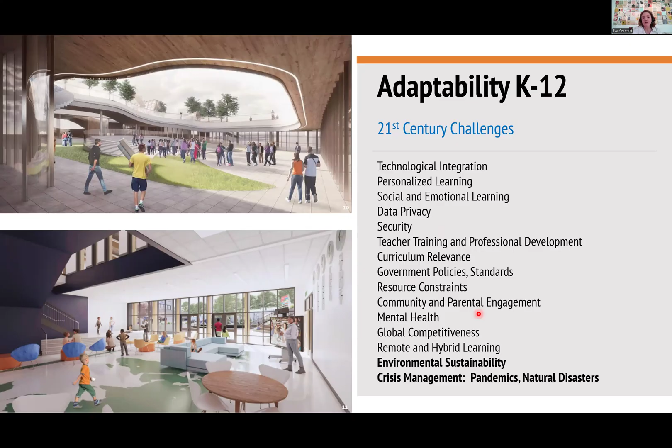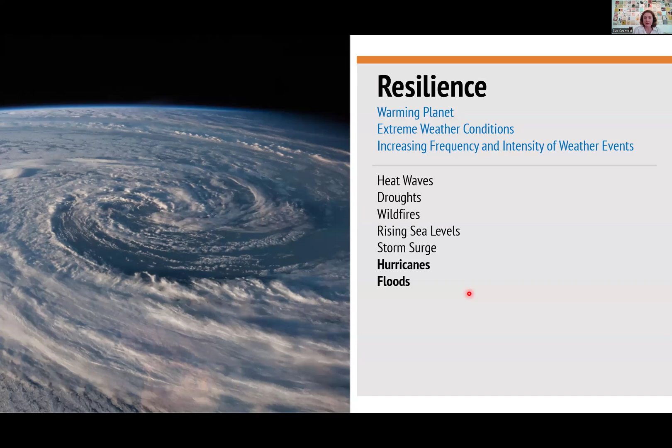Resource constraints that communities may have, community and parental engagement, and then going all the way down the list to environmental sustainability and crisis management, pandemics and natural disasters. And then resilience, and how do we deal with a warming planet, extreme weather conditions that we're faced with, and the increasing frequency and intensity of weather events. You can turn on the news every day and see these events happening all over the country: heat waves, droughts, wildfires, rising sea levels, storm surge, and what we'll be discussing today, hurricanes and floods.

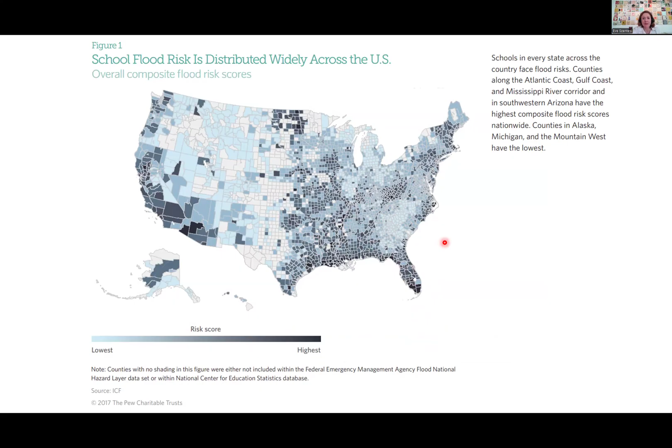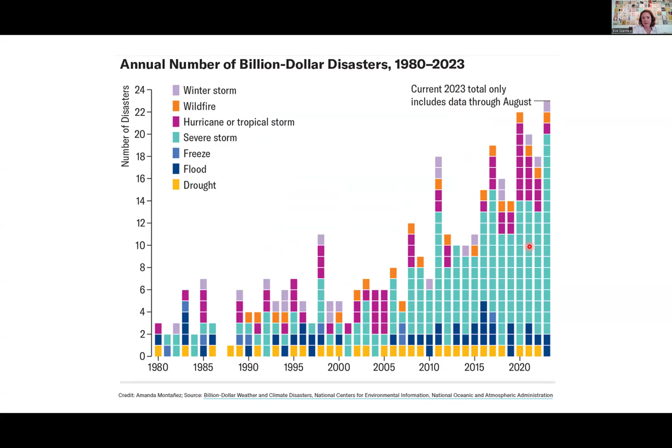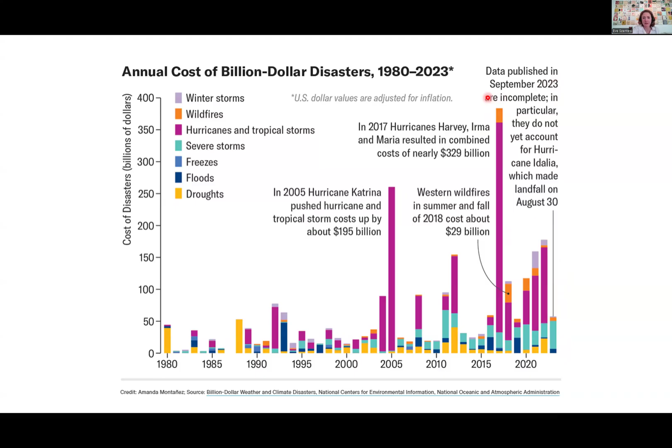So flood mitigation - these photos were taken in our area. These were up in the mountains, up in Boone, after Helene came through. But basically just flood mitigation, technical strategies, and philosophical principles.

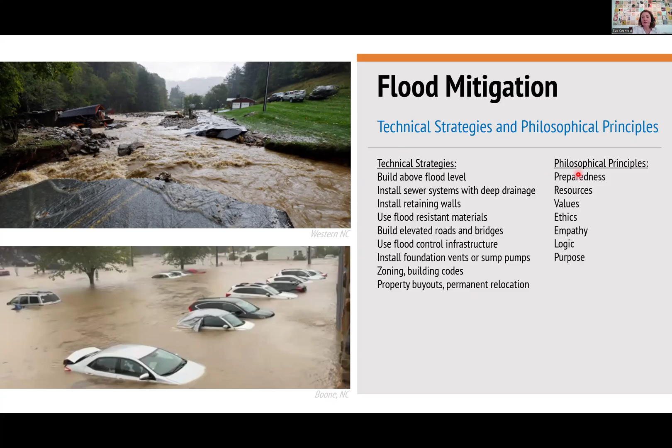Some of the technical strategies: build above the flood level, install sewer systems with deep drainage, retaining walls, use flood-resistant materials, elevated roads and bridges, flood control infrastructure, foundation vents, sump pumps, and then zoning and building codes, and then permanent relocation in some instances. And then philosophical principles: preparedness, resources, values, ethics, empathy, logic, and purpose.

This is just showing in our area that we have different areas where we have different types of events happening in different regions, but it's a whole host of different types of geography. So here's our case study.

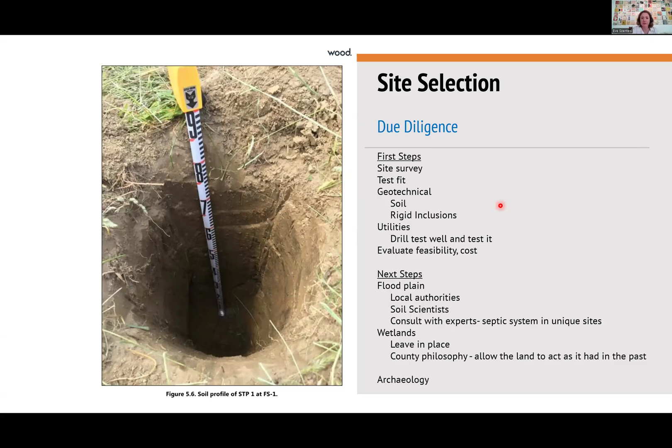So we looked at several sites with them and did site surveys, test fits on them. We had geotechnical engineers looking at the soil. Utilities were an issue - we had to drill test wells, test them, and then look at the feasibility and cost. Once they went through all the first steps and got a check mark, we would go on to the next one. We evaluated the floodplain issues on the various sites, and there are a lot of wetlands in the area as well. We also did an archaeological study of the site.

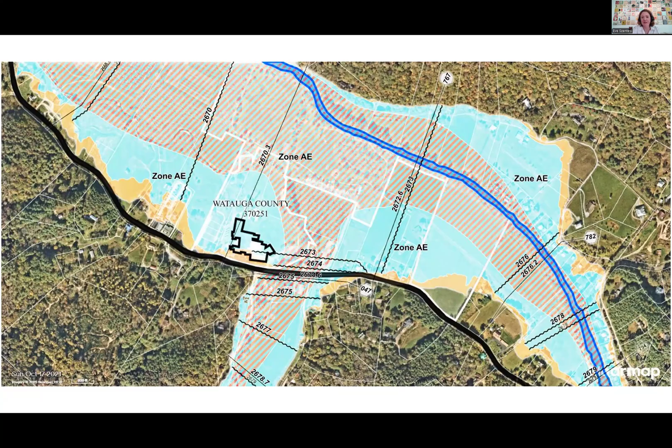So this is our flood map - you can see what's going on here. This hatch is the floodway, where we're not able to build any permanent structures. The blue part is a 100-year floodplain, and the orange is the 500-year floodplain. You can see on our site that it's a little bit of an improvement, but not a lot - that was pretty challenging dealing with the high floodplain. So here we are - this is a section of our site.

So Broadstone Road here at the high point, and then down here it slopes towards the Watauga River. The 100-year floodplain base flood elevation on the site is 2675, and you're required in Watauga County to go 2 feet above the flood elevation. We went 4 feet instead of 2, trying to find a balance with the elevations on site and how much fill we wanted to bring in. We wanted a bit of a safety factor, given what we knew about the history of the site and the flooding.

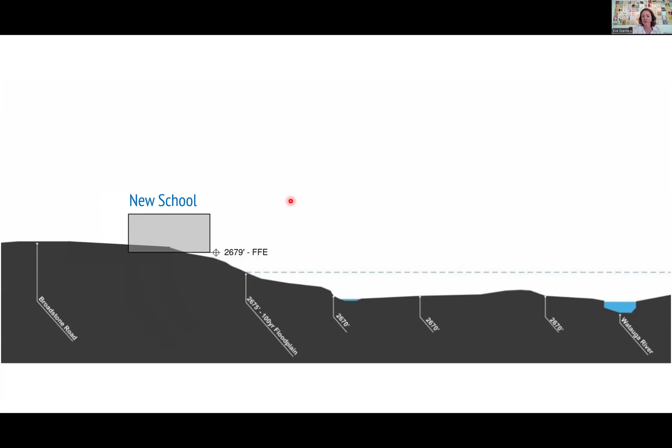But there were other considerations too. It would be great to go even higher, but because it's in a historic district we were limited to the height we could have with our building, so there were massing restrictions. We ended up 4 feet above the floodplain.

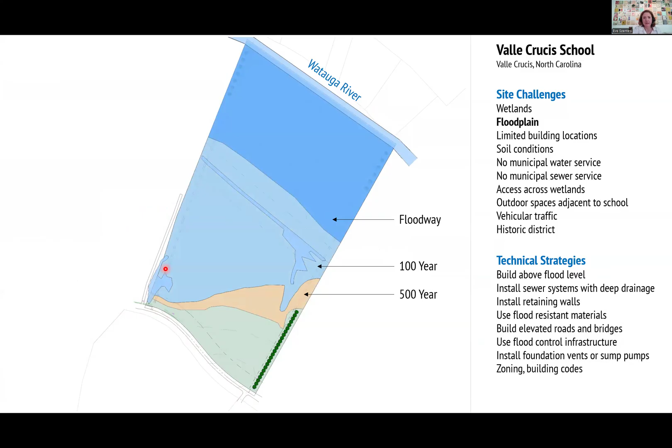So here's our site, the Watauga River back here and Broadstone Road here. These are some of the site challenges, the wetland areas I mentioned earlier, and here's our floodplain information. We were really limited to this corner of the site as far as trying to do something cost effective. We raised this entire site 4 feet all the way around, and we had to place the building on rigid inclusions because of the soil quality.

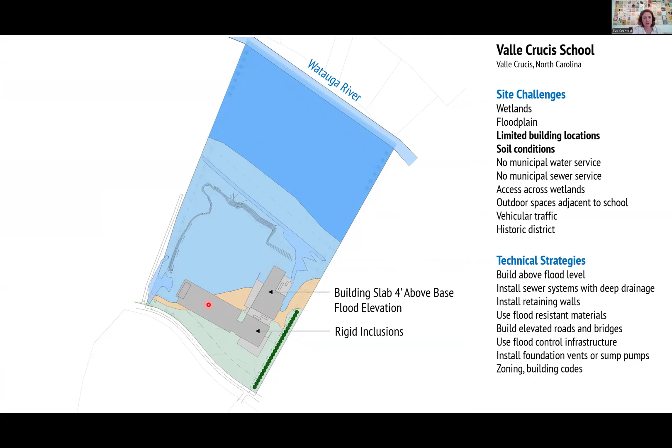We also did not have any municipal water service on the site, so here's our well and the 100-foot easement we put in place. We also needed a fire sprinkler tank. So without municipal water service, you'll see what looks like a silo on the project—that's our tank devoted specifically to the sprinkler system.

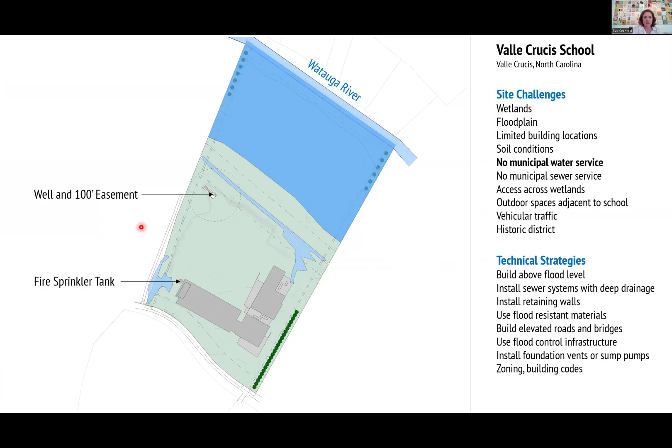There's also no municipal sewer service, so we have a septic field. All of the major components and equipment for the sewage septic field are 2 feet above the floodplain, and they're built so that if there's a flood event, the force main check valve on the system shuts down.

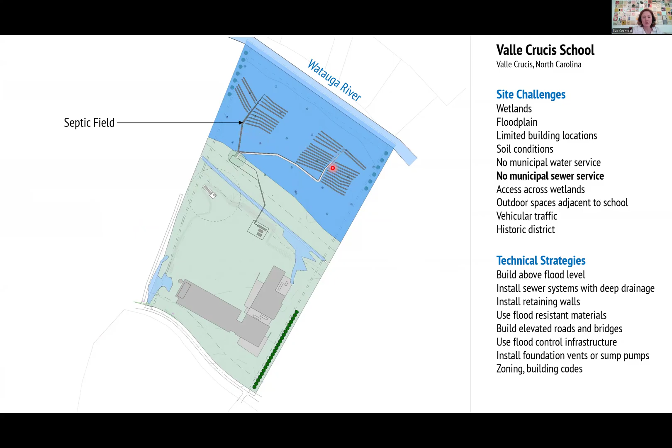Because we're restricted to this corner of the site, we had to bring in vehicular bridges to cross the wetlands. We left the wetlands intact—that's the philosophy of the county. The wetlands actually come under the bridge we added and under the building in sections, so a portion of the building is suspended over the wetland from the structure above.

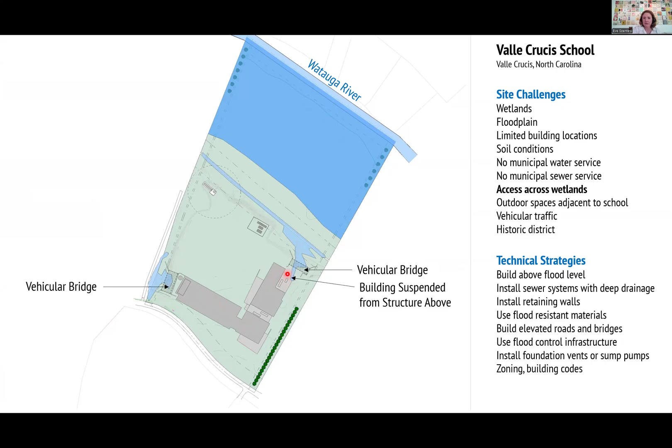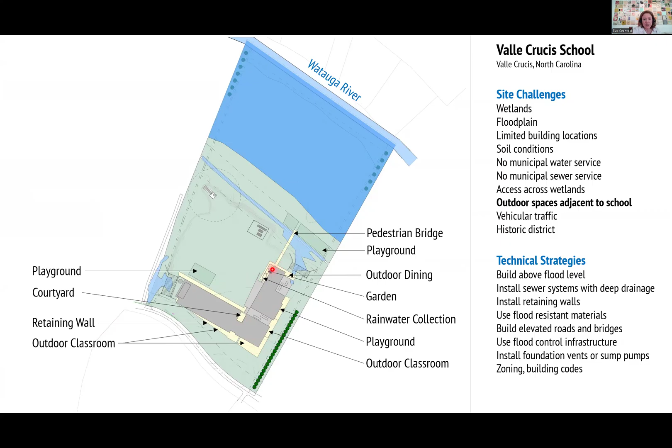They also wanted outdoor spaces adjacent to the schools, so we have a series of retaining walls, and these yellow areas are outdoor learning areas. We have a green roof here that's also an outdoor classroom for the older kids, and all these little nooks and crannies become outdoor classrooms. There's a courtyard by the main door, and we also have outdoor dining at the cafeteria, rainwater collection, and a garden for the kids to plant vegetables and things.

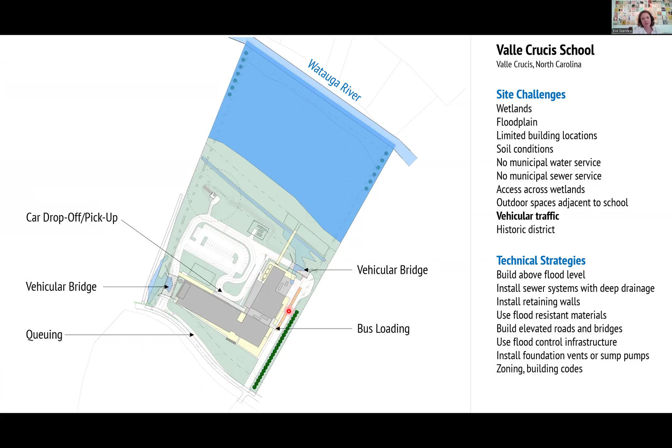So when we drop in the circulation, you can see there's a queuing area here, and then the cars come in and there's a drop off. The buses peel off here and go across this bridge, and the bus drop off is over here on this side. You can see this under construction right now.

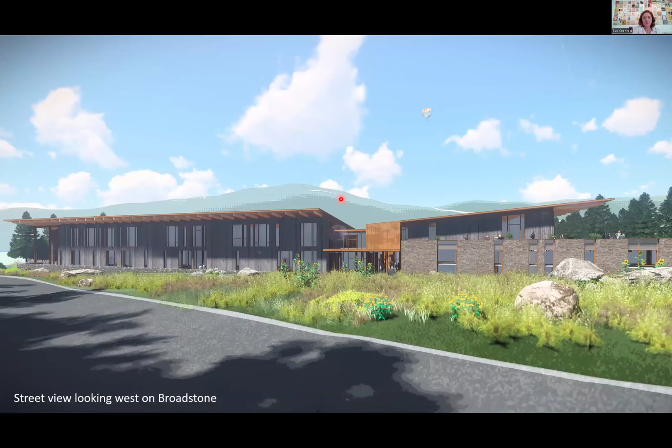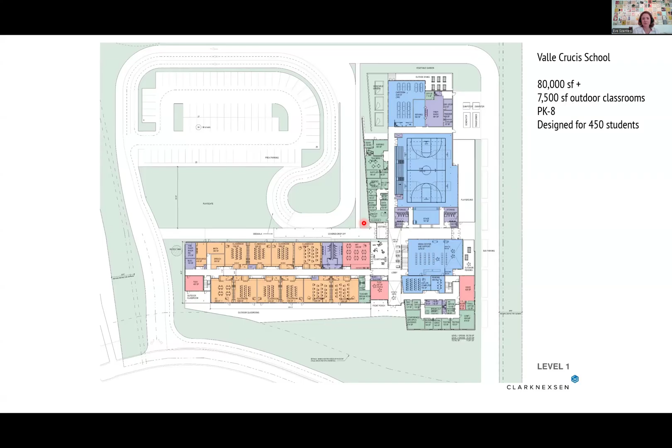We have the media center here, and then support spaces over here. Anything in red is a flexible space. We built more square footage into this to accommodate growth. A lot of these classrooms right now are not flexible, but a few are. This is the second floor, with our green roof over here, some band and CTE classrooms, and then the rest of the classrooms over here.

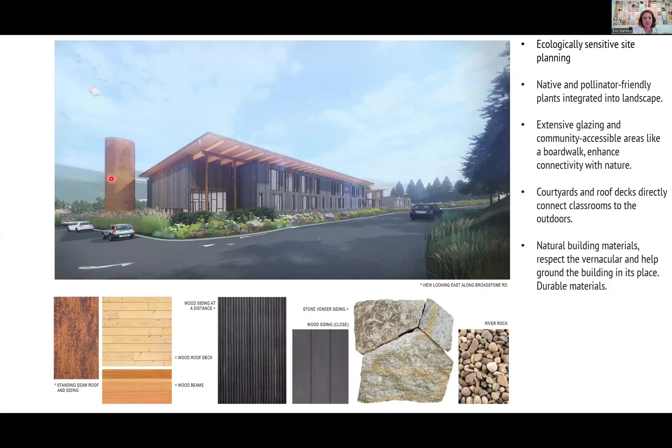Here's our sprinkler tank, and here you can see our green roof and some of the stone siding. The existing original portion of the school has stone siding, so we tried to take that stone pattern and color to resemble it.

You can see retaining walls here, and these are some of the outdoor classroom spaces, and around the building there's a pedestrian walkway that crosses over to the field on the other side.

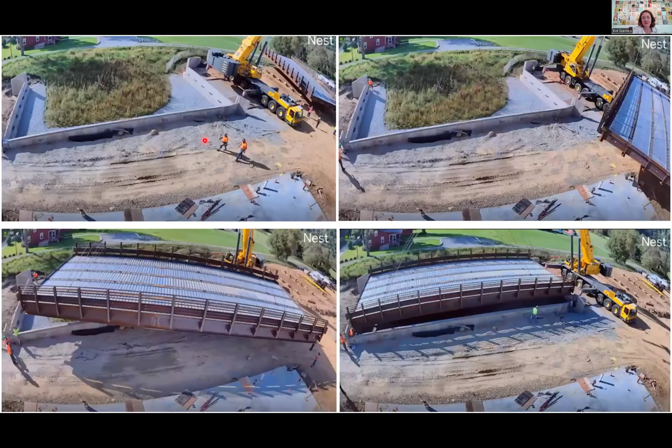Just to give you an idea, this is one of the vehicular bridges. In order to preserve the wetland, they built the abutments around it. We're not allowed to touch the wetlands at all during construction, so it's been challenging in terms of the construction.

This was taken from a camera off the roof of the building. They built the bridge on site, then took a crane and swung it into place and lowered it down. We were really excited when it fit - it was a very exciting day, pretty cool.

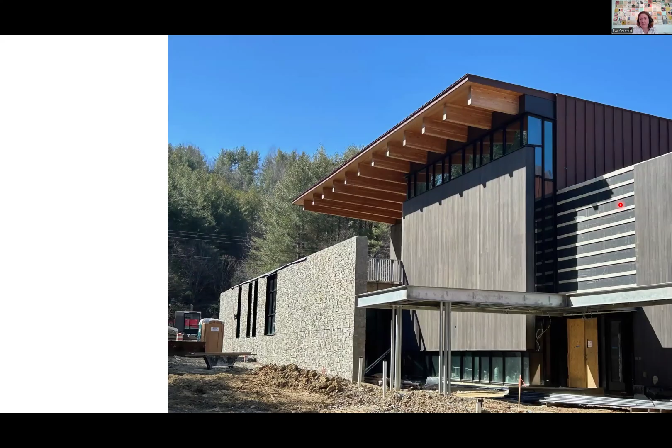Some of these, the cladding is in process. Any horizontal battens you see are areas where the acetylated wood just hasn't been installed yet. There's a classroom tucked back in here, an outdoor classroom, and then this is the cafeteria and the neighbor - you can see how they kind of have a dialogue with one another with the cladding.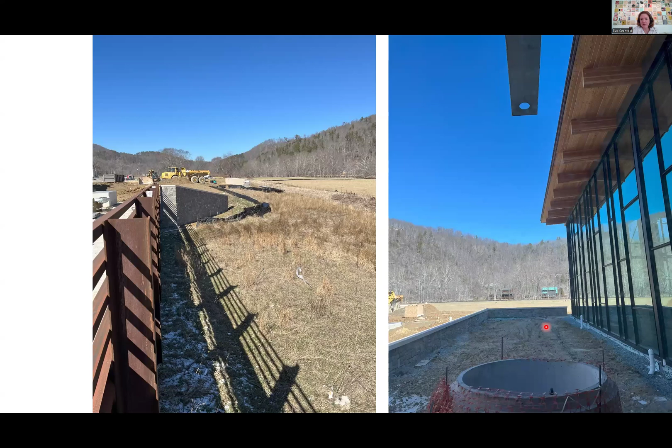Here's our rainwater collection cistern. This is where the planter boxes will be. And again, showing the wetland.

So that's the front door. This is when you walk in the building after you come through the security vestibule, the media center.

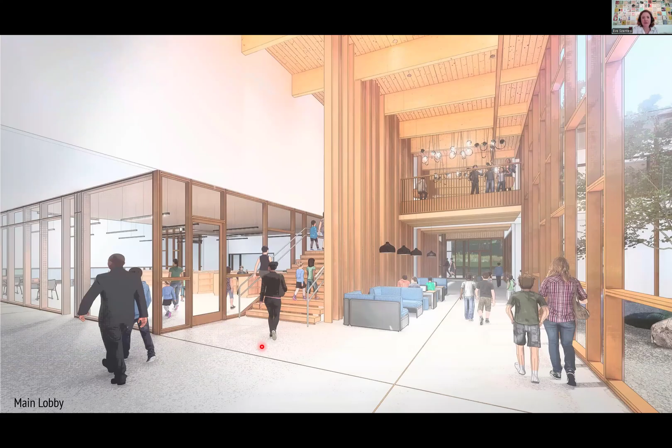Here, again, more natural materials - we use a lot of wood in the project. We have glue lams and structural wood deck and a wood screen that becomes part of the guardrail system. This is not a wood curtain wall, it's aluminum. And this is looking at that little area right at the front door.

It'll have a tree. This will be an area where kids can hang out when they're waiting for their parents to come and pick them up. And this is a view from the cafeteria showing the garden.

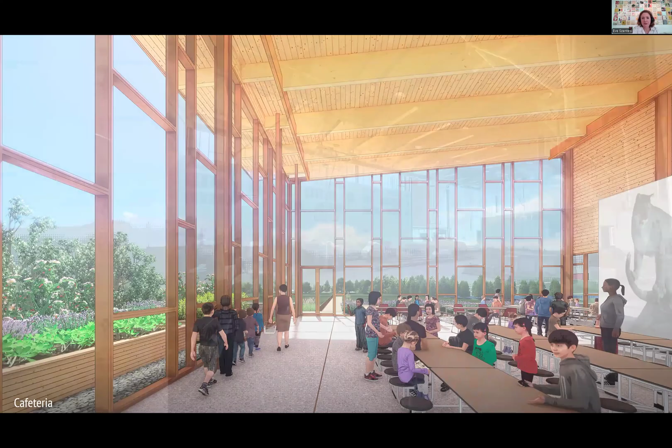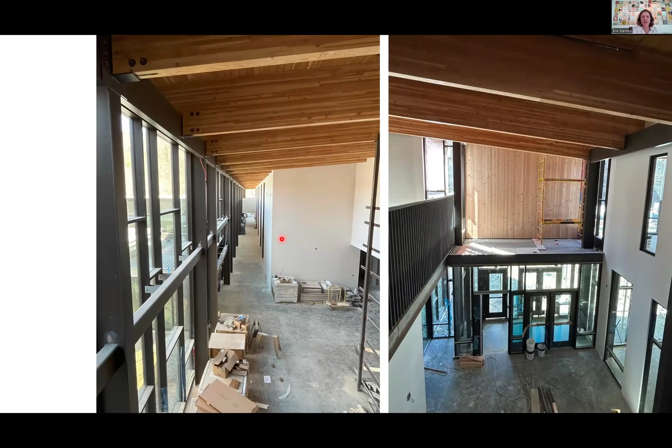One other thing - you can sort of see the columns for all of these canopies are downspouts. One is structural and the other is a downspout. And then this is from the second floor, looking in two directions - looking to the north towards the cafeteria and looking towards the south towards the street.

So then how does this all work with the hurricane?

Hurricane Helene came in last year in September, and it came into Florida, then went through South Carolina, into North Carolina, and then into Virginia on September 27th.

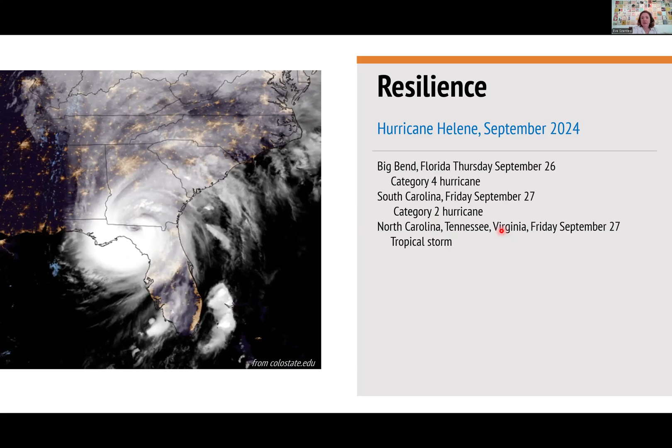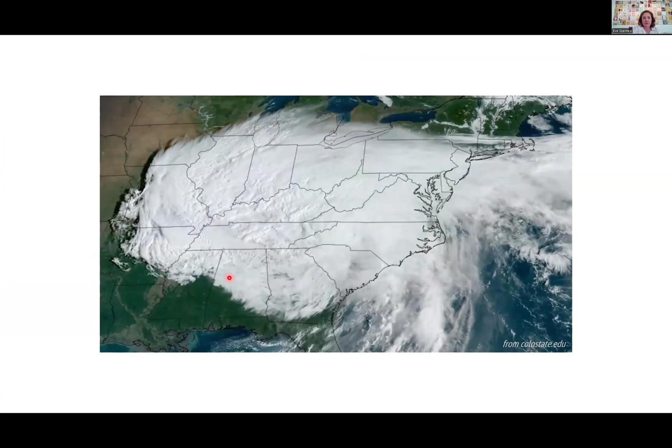During Helene, it went up to 27 feet and broke. We don't even know how high it actually went, but it was pretty serious. And then this shows the wind during the hurricane.

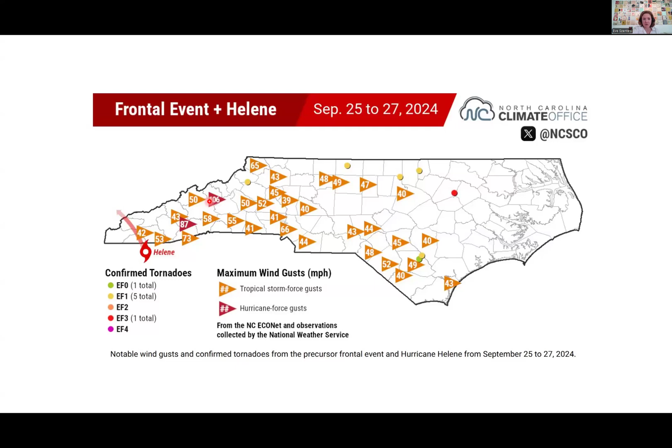These are some of the images we all saw in the news. This is Florida, Big Bend. This is South Carolina after the storm, a debris collection site. And this is I-40 in North Carolina between us and Tennessee—it still looks like this along large stretches. This is Marshall, a town really close to Asheville.

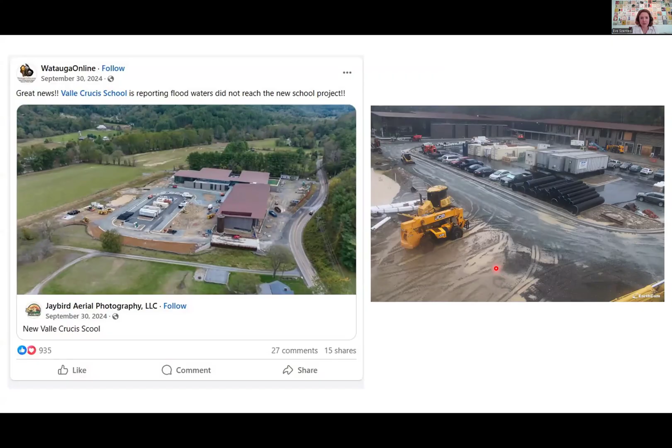So after that, just talking about adaptability by the school and resiliency by the school, they had to abandon their school, basically. It was so damaged. So they have 342 students that had to be accommodated somewhere.

So Appalachian State University, Caldwell Community College, and Valle Crucis Conference Center opened up their doors and offered their spaces to the school. So they've been operating on 3 separate campuses since Helene. The principal basically goes from campus to campus every day.

Just thinking about the logistics of food service, they have to pack everything up and distribute it to these 3 different campuses every day. So it's been really challenging for them.

So our new school is under construction. It's not complete. So the goal is to have it complete so they can start next year in the new school. It'll be completed in the summer of 2025, so fairly soon.

And this is their existing school. They asked us to take a look at it, what to do with the existing school. The day after the storm, they were told by a local inspector that they could not inhabit it at all. They were given an hour to remove what they could, and they're not supposed to be in there anymore.

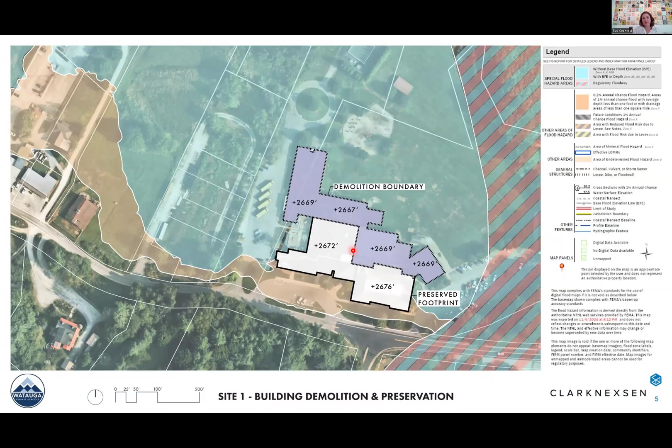They're also looking at different areas around this site. This is also owned by the county, so maybe they could develop a portion of this. Maybe they demolish all of it, now that they know how the site responds to a major flood event, and they can plan for that. Or do they just abandon it and give it to the park? That's another item that's being discussed.

So anyway, that's our project. Are there any questions?

Oh, wow, this is great, Eve. Thank you so much. We do have quite a few questions coming up in the Q&A, but first, I get moderator's privilege. I'm going to ask you a couple of questions that I have. The first one is: how is Clark Nexsen, or if you have a perspective on this, how is Clark Nexsen as a company beginning to incorporate resilience thinking more broadly? Obviously on this project you're doing a lot of stuff, and each project is going to have its own thing. But one of the arguments people have against dealing with resilience issues on projects is the added cost due to added time and the expertise needed to do those kinds of things.

So it is something that we're confronted with on a lot of projects, particularly from the Asheville office, but actually from all of our offices, from our coastal offices as well. Just right after Helene, as an example, we went to an interview with another school system in the area, and again the site was in a floodplain. So we did a quick analysis of how high they would need to raise it, and some measures that would be required. It is more expensive, but there wasn't any other land available in the area. So I think that's really the main challenge we're having right now, that there aren't a lot of other options, so it is an expensive endeavor.